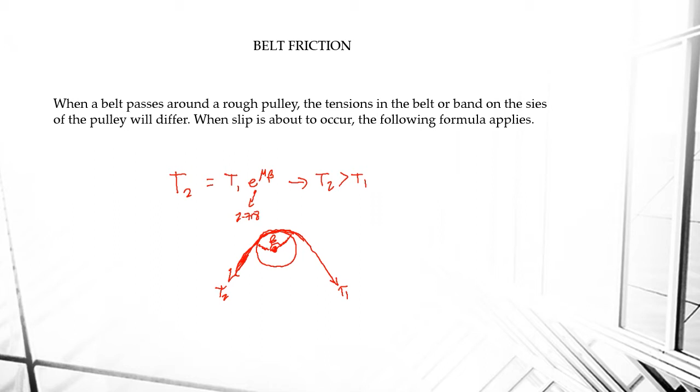Okay? So, para mas masabtan ninyo, dito ta sa example. So, what force is necessary to hold a mass of 900 kilograms suspended on a rope wrapped twice around a post? Assume the coefficient of friction to be 0.2.

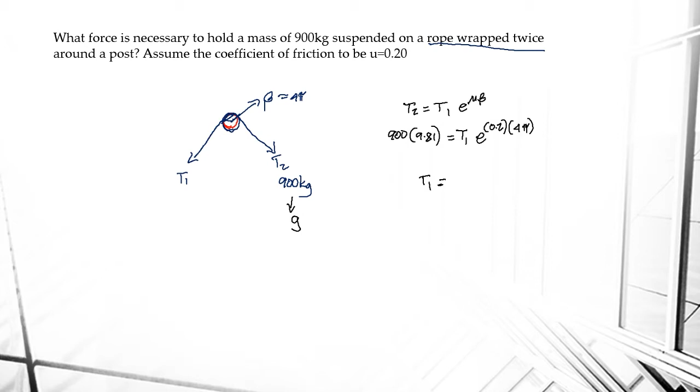Is equal to T1 e raised to mu, 0.2, unya ang iyang beta is 4 pi. Okay? So, si T1 nato karon kung ato na siyang i-solve is 715.17 newtons. So, ingana lang siya kadali.

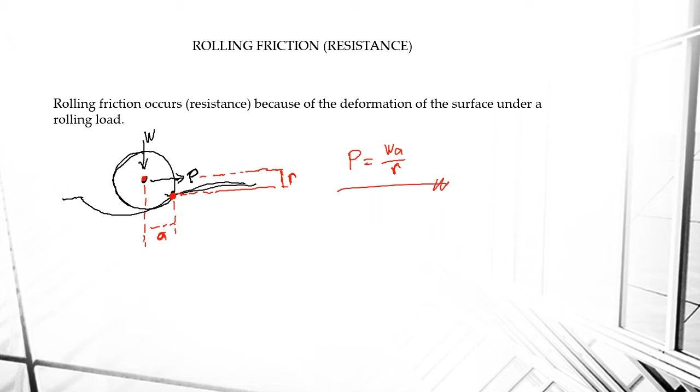Hatagdag example. So, what horizontal pull is necessary to move a 1,200 ton train along a level track if the coefficient of rolling resistance is 0.009 inch and the wheels are 3 feet in diameter?

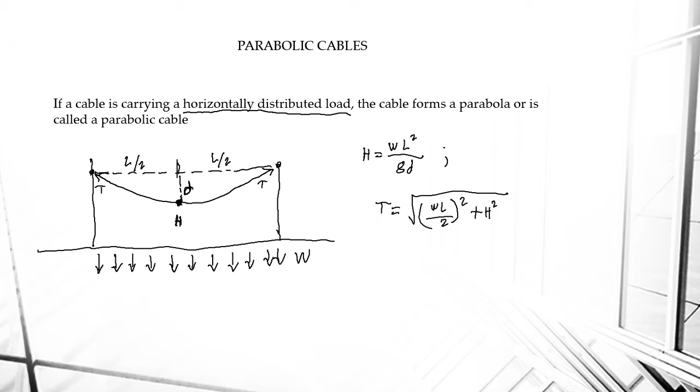So, okay, proceed ta sa example para masabtan ninyo. Determine the tension at the lowest point of the cable supported at the same elevation. The cable carries horizontal load 0.5 Newton per meter with a span of 100 meters and a sag of 1.25 meters. Butang sa given niya, para di mo maglibog.

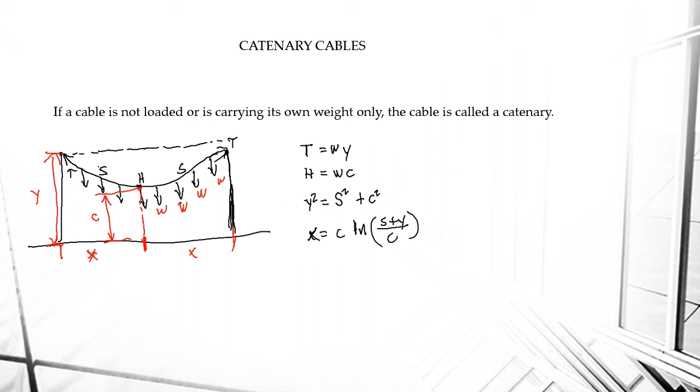A cable 200 meters long, weighing 40 Newton per meter, is suspended from supports at the same level. So if the tension at its lowest point is 5.4 kilonewton, solve the height of its supporting towers.

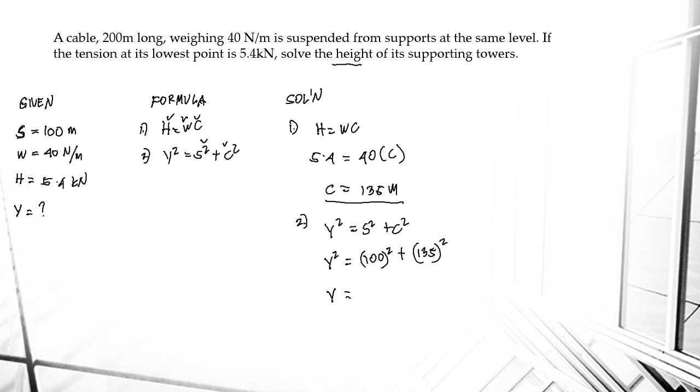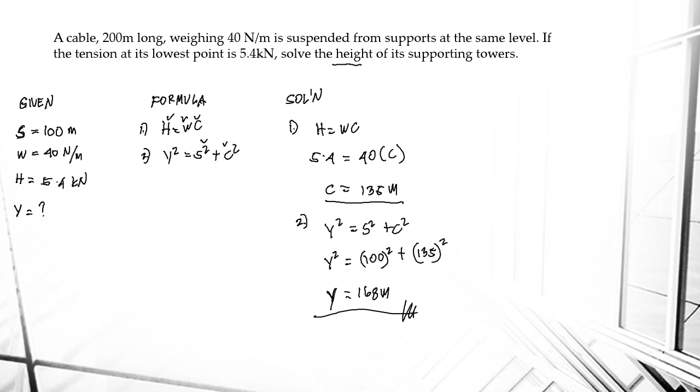Okay? So, next example ta. A cable which has a mass of 0.6 kg per meter and is 240 meters long is to be suspended with sag of 24 meters. Determine the span. Yan. So, unsa atong nabuhaton?